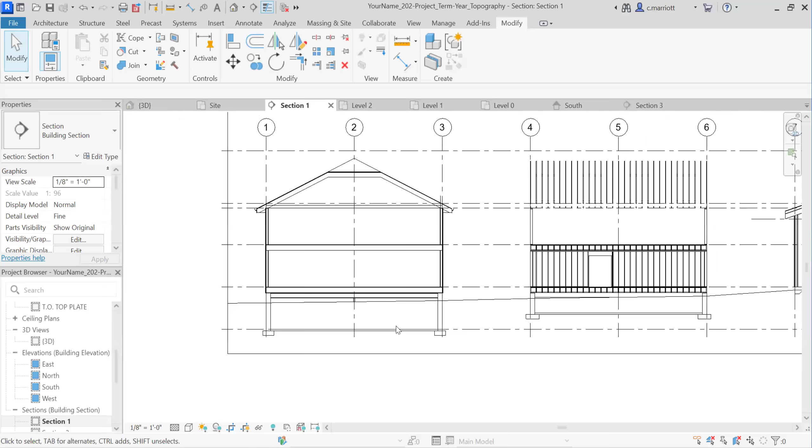In this video, we are going to work a little bit more with the topography. In the last one, we established a slope for the Toposolid. Now, as you can see here, the earth hatch is cutting through the structure, and we need to remove that. So we're going to start with creating something called a void form, which we'll then cut out of the topography.

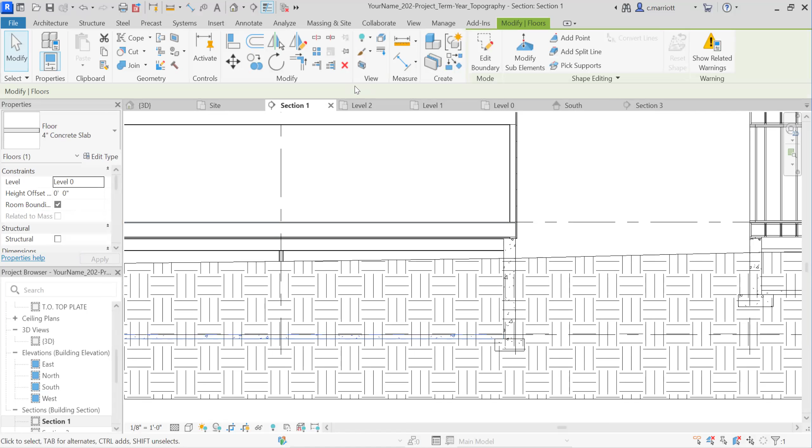I'm going to go to level 1. Basically what we're going to do is create a mass that is the interior space of this basement. Just to step ahead a little bit, I'm going to measure from this point here to level 1: 9 feet 4 inches.

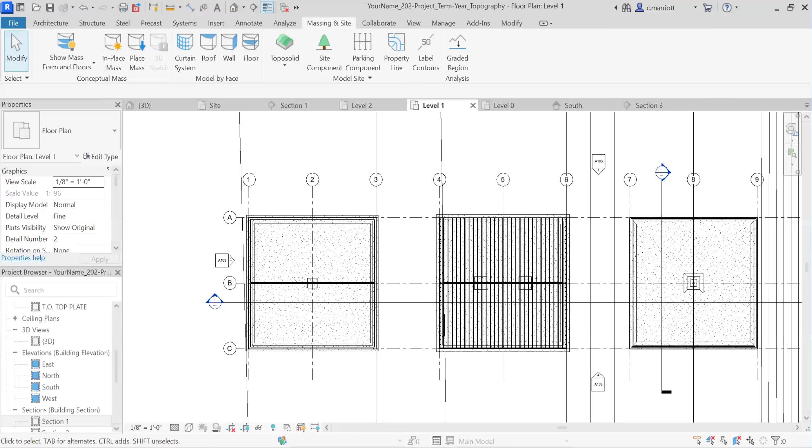Now what I'm going to do is go to level 1, then go to the massing and site ribbon. This should say show mass form and floors, and then I'm going to click on in place mass. You may want to change the settings so you can see pretty much everything that's below there. I've changed the visual style to wireframe temporarily, and we're going to make this void.

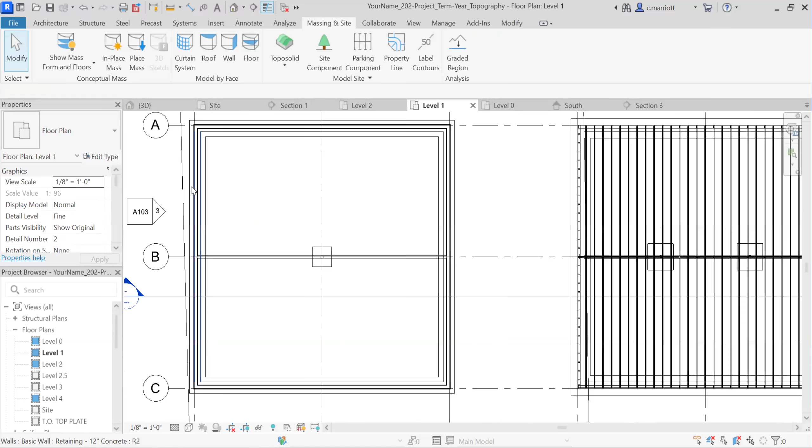Basically, it's going to go from this interior face of the foundation wall. This line right here is the footing below, so we want to disregard that. In place mass is what I want to do. You can just accept the name given by default.

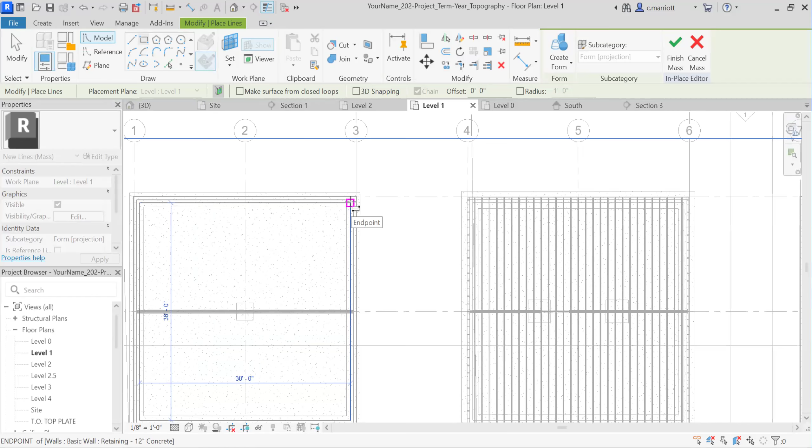What I'm going to do is click on the rectangle tool, and I'm going to snap to these two corners, this one here. Again, I want to make sure I'm not snapping to the footing, but I'm snapping to the face of the foundation wall.

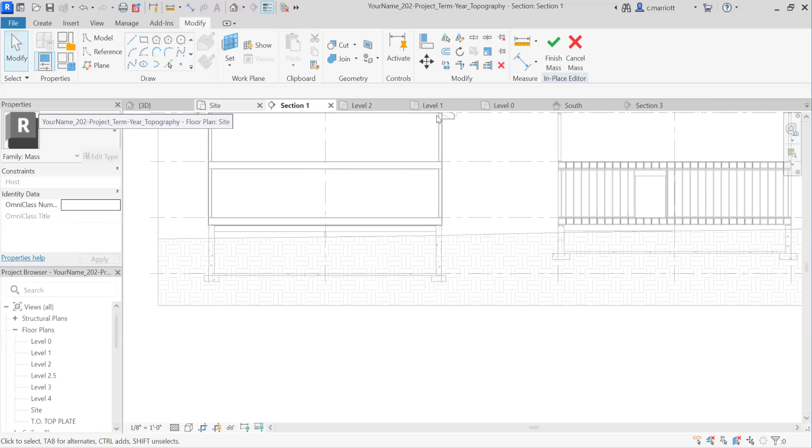Now what I'm going to do is go to section 1. I'll go back to level 1 and click on that. I'm going to create a form from that, so I'm clicking here. I'll choose the void form, because again, we're trying to subtract this out.

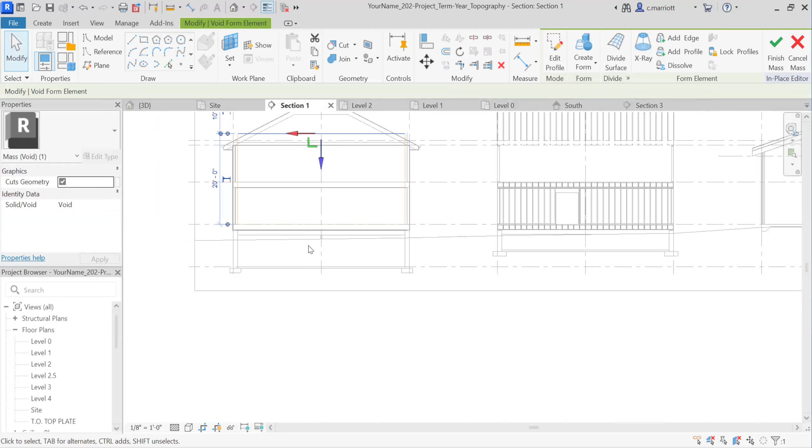Right now, let's see if I can go to section 1. So you can see here, it is pushing it upward from there. I want to make this go downward 9 feet 4 inches. Now you can see it's filling that space below.

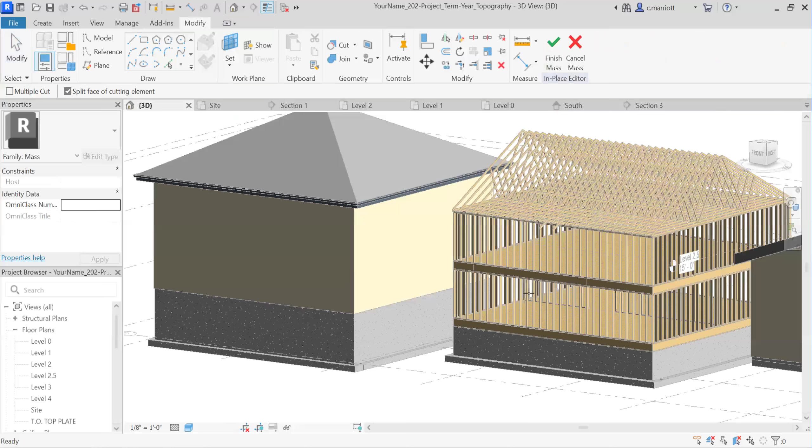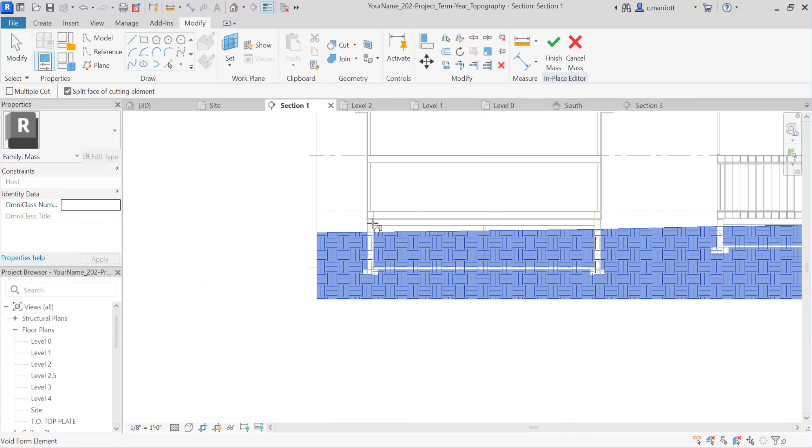While I'm still in this, I'm going to go to the cut geometry tool. Let's go back to section 1. It's going to ask me to select the solid geometry to be cut, and I want to choose the topography. Then the void, so that's when I will pick this void form here. You can see it has now subtracted that from the topography. I can click on Finish Mass.

Now the topography is still cutting through the foundation wall and the slab, and I can do that also by using the cut geometry tool, picking the topographic solid and then picking individual items here. So I'm going to do this and go through this whole process. Here's the slab, I'll do it for the footing. Let's try that again, pick the topography or the Toposolid.

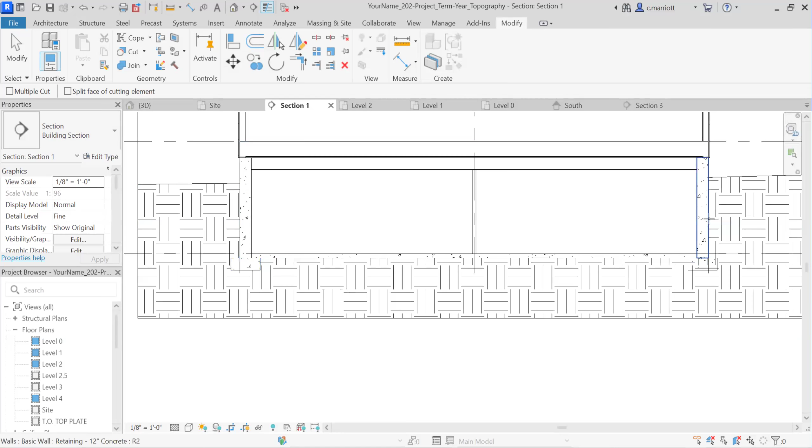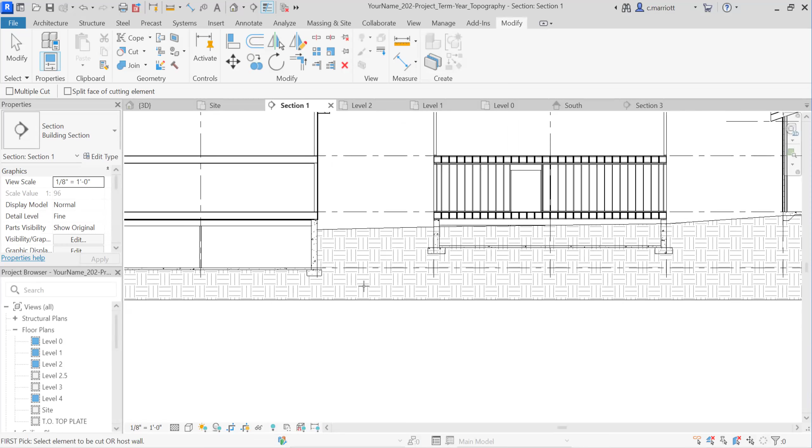Go to cut, pick the Toposolid, and then whatever it is that I want to remove from that. Let's try this one more time: cut, and then the footing. So basically, we don't want the hatch to go through the foundation walls, the footing, or the concrete slab. Now I'm going to repeat these steps for this one that has a crawl space.

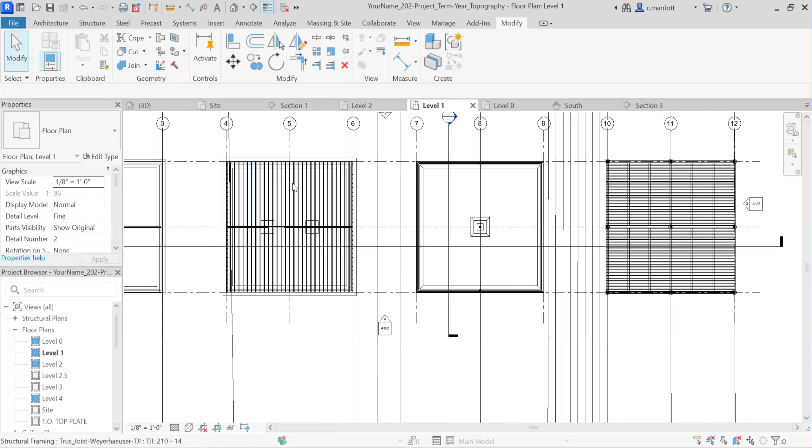So again, I'm going to measure how big that void mass needs to be: 5 feet 8 inches. I'll take it through the same process. Again, I'm going to start with level 1, and I need to first identify where this void form needs to be.

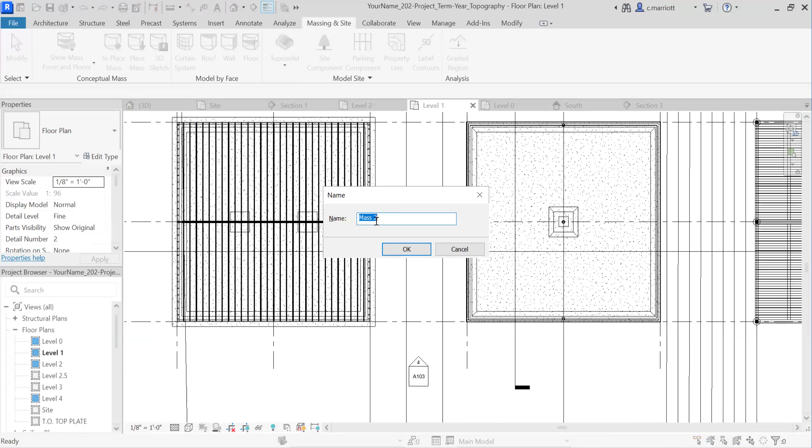Because I have set it to wireframe, there's a lot of things happening here, but basically this right here is the foundation wall. So what I'm going to do is go back to massing and site, show mass form and floors, in place mass. This one will be called mass 2, or whatever the next number is if you have other masses in your file. I'm going to use the rectangle tool here, and snap to this point right here and the opposite corner over here.

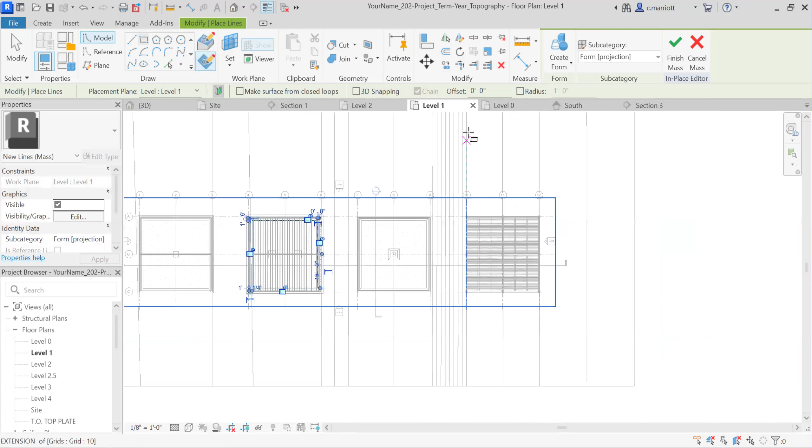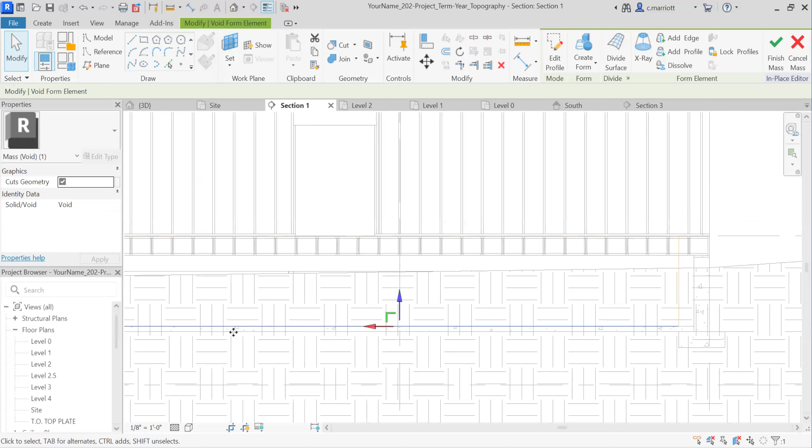I'll do the same thing, create void form, and let's go to section 1 and see what we have. Again, that measurement I took was minus 5 feet 8 inches, so there it goes all the way down. And you can see that I misdimensioned, so I am going to cancel this one and repeat that process.

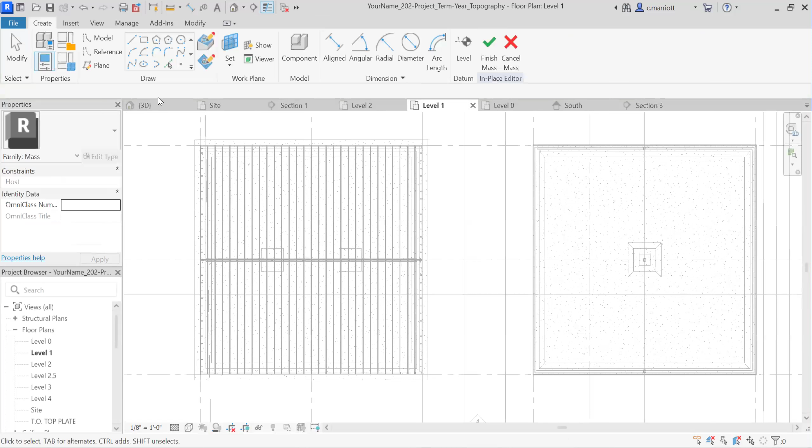Again, go to level 1. I guess I must have picked the footing line, I want the foundation wall. So let's repeat the steps: massing and site, in place mass, mass number 2, use the rectangle tool. This time I'm going to snap to the inside of the foundation wall, here and here. I'm going to go to create form, void form.

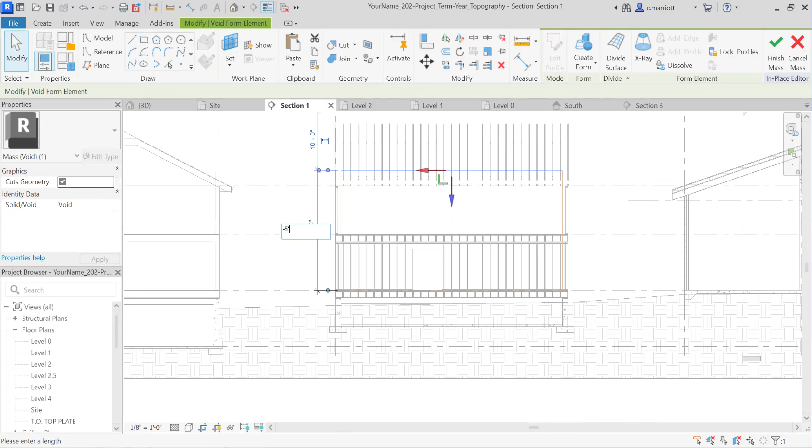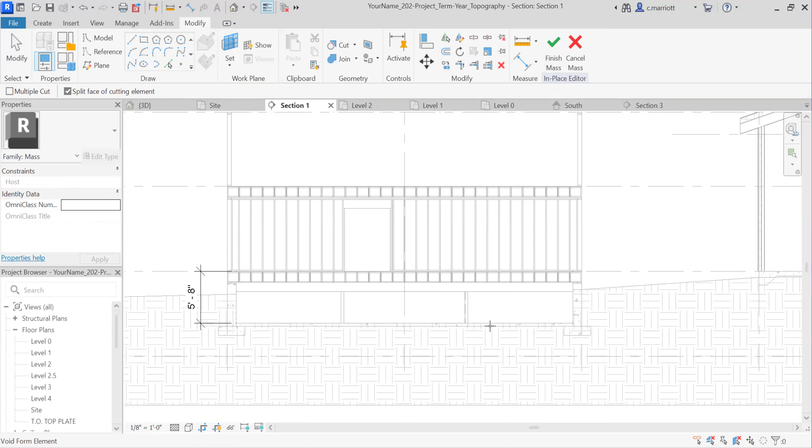Then I will go to section 1, change that value to minus 5 feet 8 inches, and you can see it's dropped down, so it's sitting at the top of the slab. I will go ahead and use the cut geometry, pick the topo surface, then pick the void mass. You can see it's subtracted that out. Finish mass. Lots of steps to do this, but if you go one by one, everything should be okay.

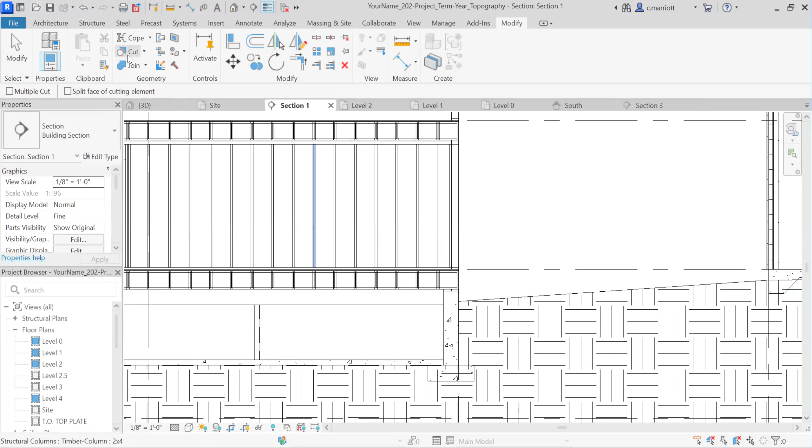I'm going to use the cut tool and do the same thing I did with the full basement. Again, this is the crawl space, the structure has the crawl space. Geometry here and the footing. And we've removed all that earth hatch.

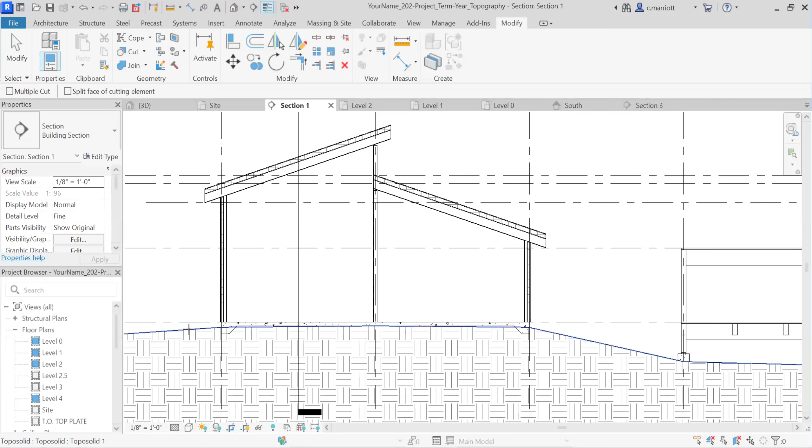Now the only other one that needs to be done is this one here. I don't have to go through all those steps with creating the void mass, I just need to pick, using cut geometry, pick the topo surface, and pick these thickened slab edges. So you can see now that it's no longer going all the way through. That is all you need to do for this step.